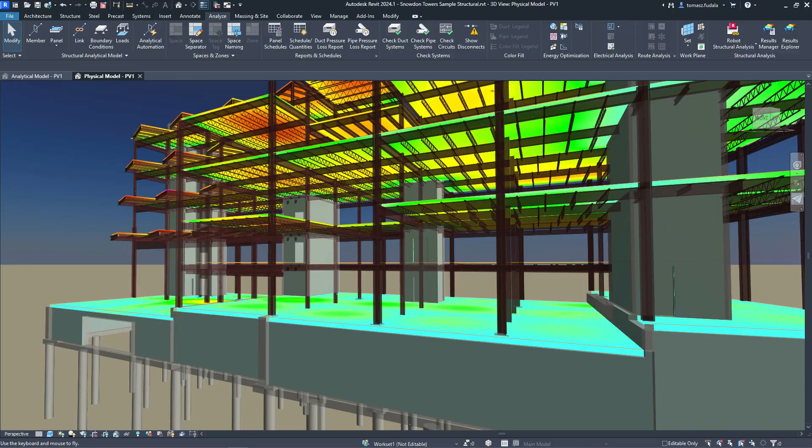As more and more structural engineers connect to and embrace building information modeling workflows, there is increasing demand for analytical collaboration in BIM. Structural analytical modeling in Revit enables engineers to coordinate across physical and analytical models and drive BIM-centric analysis workflows within Revit.

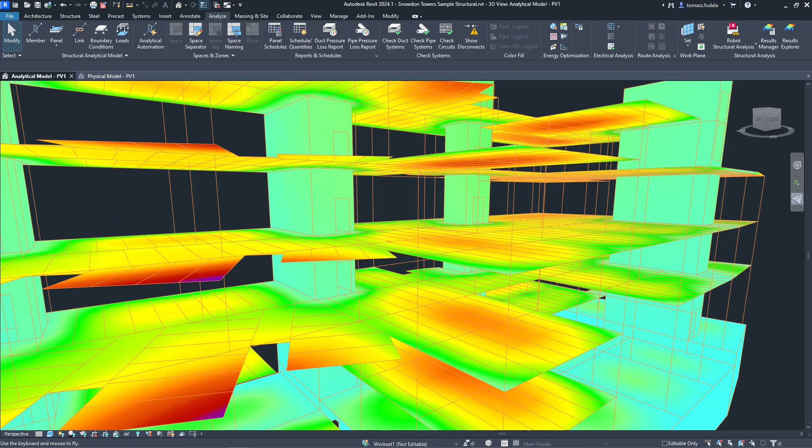In Revit, structural engineers can leverage existing physical geometry in 2D and 3D views as context for the analytical model, and then decide the physical-analytical relationships element by element.

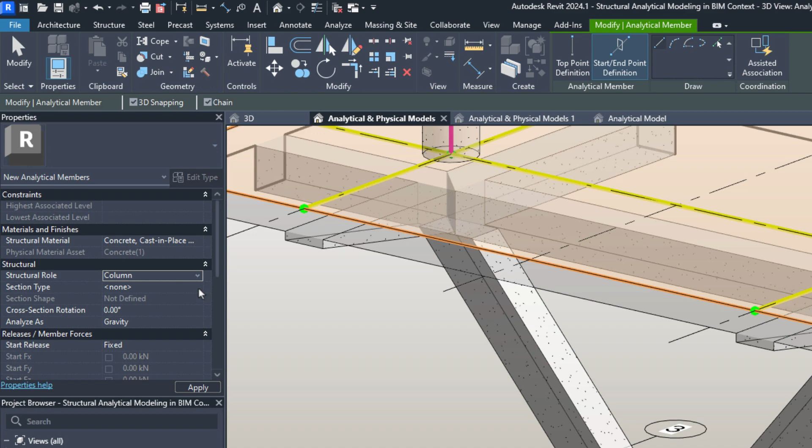The analytical elements are fully parametric and associated with grids and levels, enabling you to control analytical model positioning using these datums and others.

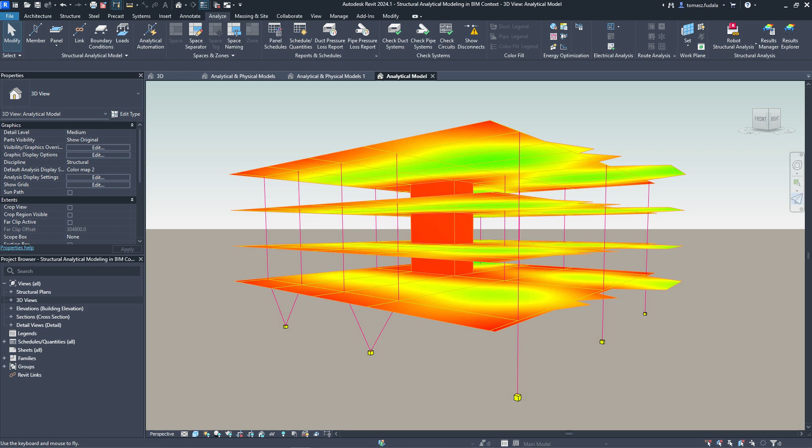When modeling analytical elements, you can assign their structural role, type and shape, define their cross-section rotation, and specify how these elements should be analyzed.

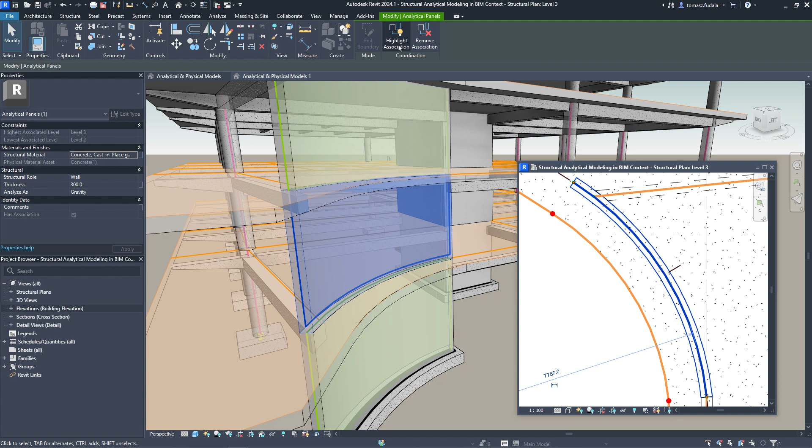To keep track of the relationships between physical and analytical model elements, you can easily associate them to each other. When this is done, associated elements can be easily located within the model, and this association can be utilized for automating synchronization of properties between physical and analytical models.

Also worth mentioning is that structural engineers can associate multiple analytical panels or members to a single physical object, or vice versa. For example, several analytical panels used to represent a single physical floor, several beams associated to a single multi-span analytical member, etc.

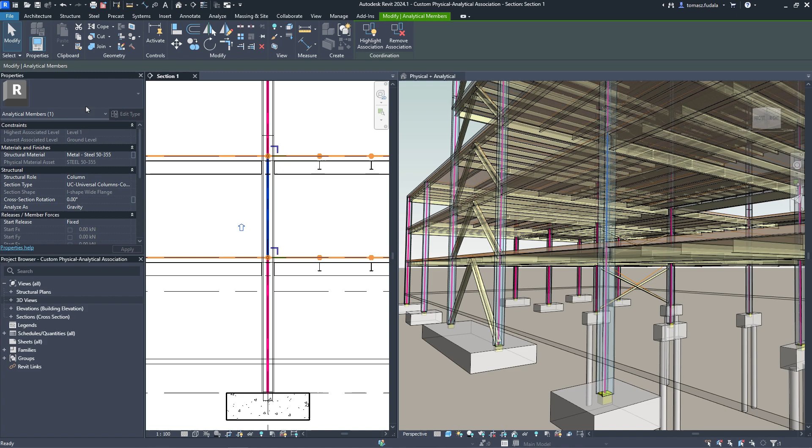The analytical model can be associated to physical geometry, but at the same time, it remains independent, providing you with the benefits of speed and accuracy in model creation and editing while protecting the analytical model from unexpected changes.

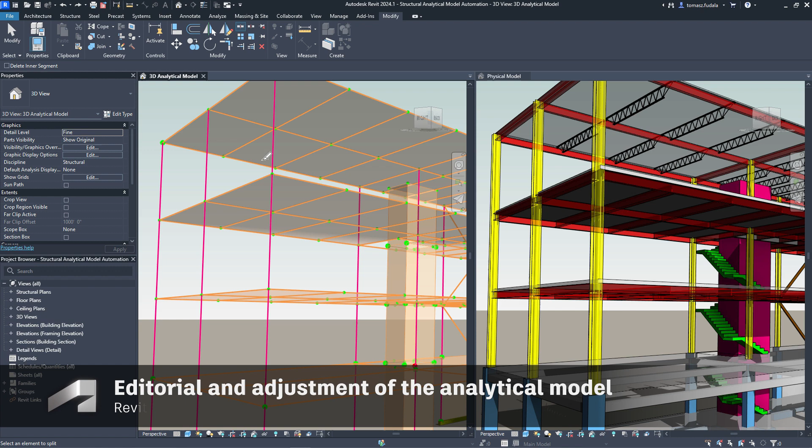Revit provides engineers with a diverse range of tools for editing an analytical model, greatly enhancing the efficiency of the model creation process. You can perform tasks such as splitting, extending, trimming elements, and much more.

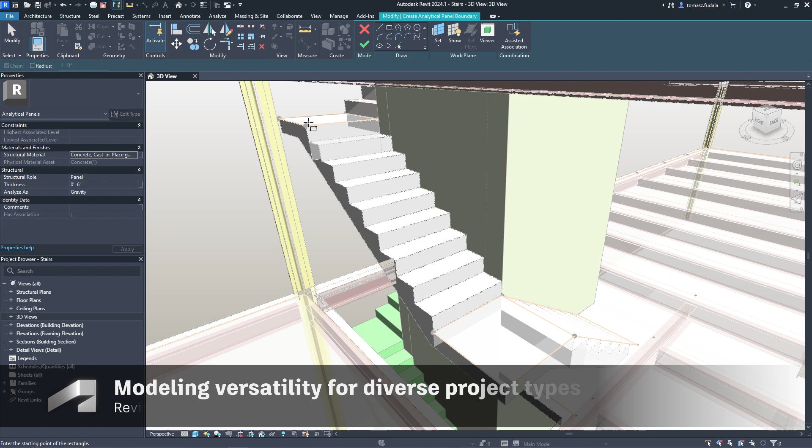With the modeling autonomy enabled by member and panel objects, the analytical model can represent not just Revit structural elements, but also generic objects, roof structures, stairs, compound geometries, etc.

Revit also provides structural engineers the rules-based structural analytical model automation. This tool enables you to generate a structural analytical model automatically from selected physical geometry and vice versa.

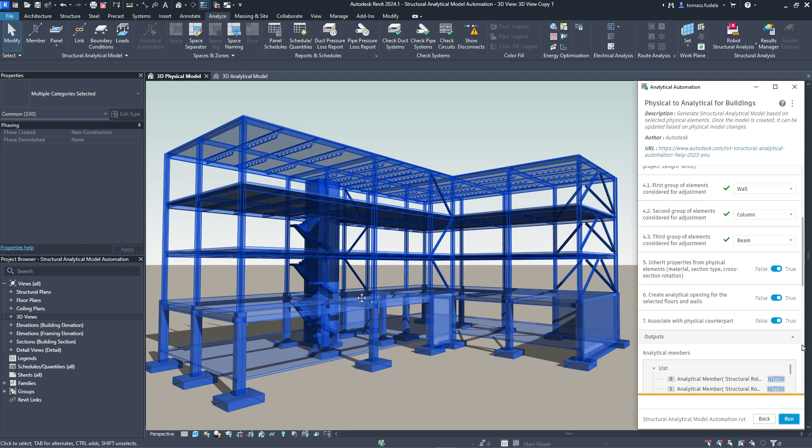This solution ensures that the automatically created model is always consistent and connected, eliminating the need for tedious corrections and rework.

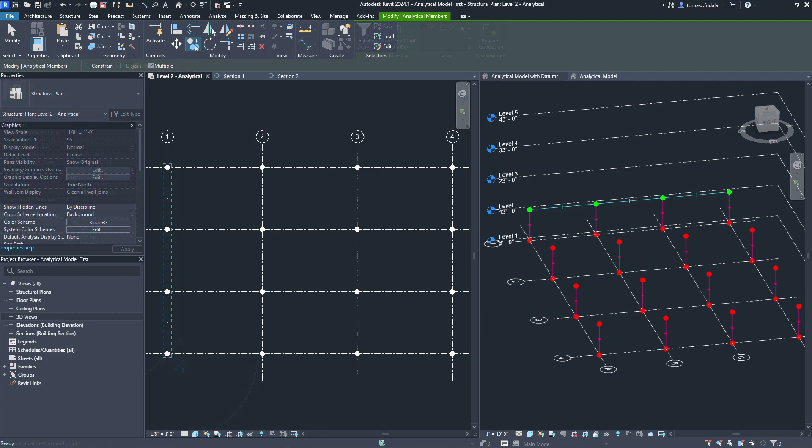As the analytical model is completely autonomous, it allows structural engineers to initiate structural analysis workflows from Revit without any physical geometry. Instead, they can start a new model from scratch and focus exclusively on aspects of analysis.

Engineers can start modeling with analytical geometry and simply add physical geometry when needed for the construction documentation and detailing phases. This workflow is especially well suited and applicable to projects where engineering requirements dictate the design.

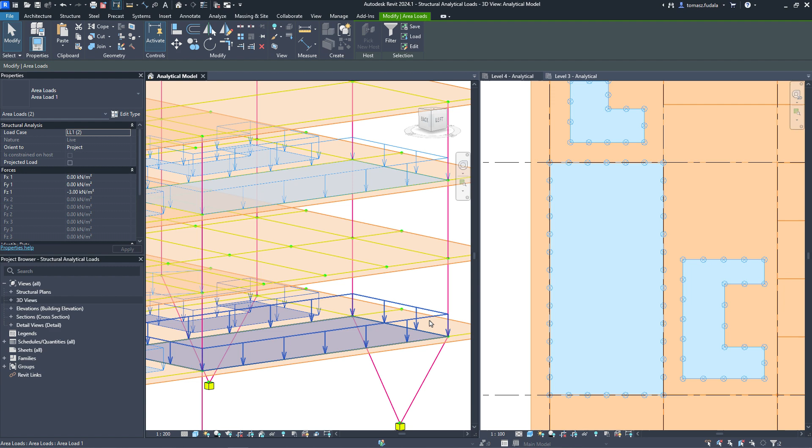Depending on the load duration and type, different natures of loads can be created. Then various types of loads such as point, linear, and planar loads can be applied to a structure and assigned to previously defined load cases.

These loads can be easily and accurately applied to specific areas of panels and members or copied to other analytical hosts.

Revit's unleashed versatility for defining analytical model geometry enables true bidirectional analysis software workflows and capturing edits made in other tools while eliminating modeling limitations.

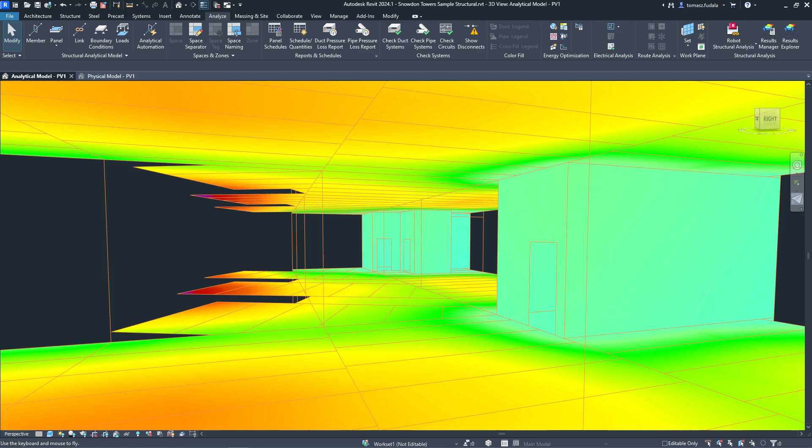This BIM-centric approach to structural analytical modeling offers many benefits to structural engineers. You can more easily create representations for any type of structure: buildings, bridges, frames, pavilions, stairs, and more.

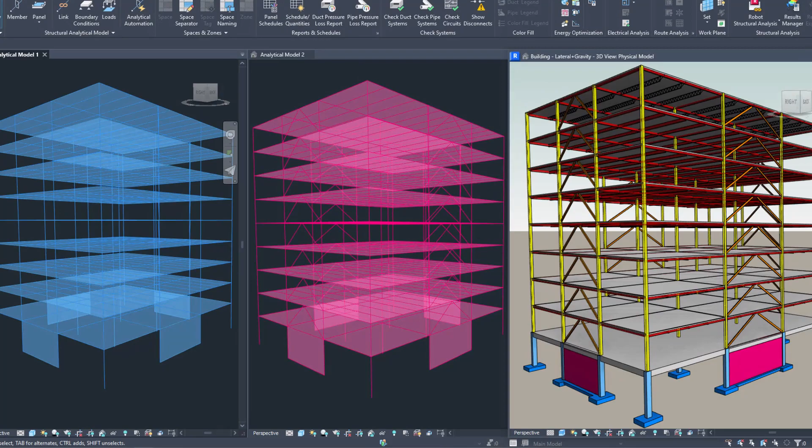You can create consistent analytical models that align with their preferred engineering approach. You can enable structural analysis jobs from Revit models. You can even create multiple analytical models for a single physical representation and consider various analysis approaches simultaneously.